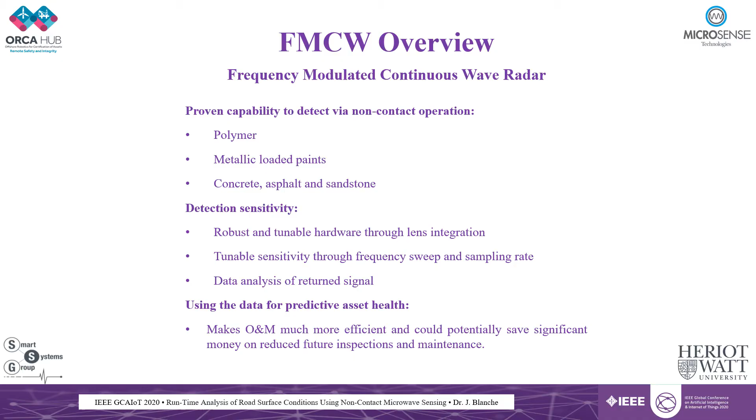The system represents robust and tunable hardware with the potential for dielectric lens integration to determine radiation spot size on a target with tunable sensitivity through frequency sweep and sampling rate, and with multiple options for post-processing of the acquired data, either via real-time edge computing prior to telemetry or for later off-site data analysis during integration with digital twin architectures. Of course, using the data for predictive asset health makes operations and maintenance of an asset much more efficient and saves money via reductions in maintenance downtime.

To continue the overview from the previous slide, FMCW analysis of a target provides previously inaccessible data on measurands indicative of failure modes in low dielectric materials and metallic surfaces, with key advantages over other integrity monitoring techniques. The system is non-destructive and non-invasive, which reduces the risk by eliminating physical intervention and interaction. This means that the sensor can be used from a more remote or safe position with a usable range in the tens of meters. The data can be edge processed and communicated via telemetry in real-time or runtime. This is via handheld, vehicle, or robotic mounted deployment.

The sensor is harsh environment capable, meaning the millimeter wave signal can return data in opaque environments, mist, dust, and in high temperature, high pressure settings, ultimately reducing downtime by operating in challenging conditions where optical systems fail. The system is reliable, with simple, robust, solid-state electronics designed to military specifications, meaning it can take a G-load shock having been ruggedized. The sensor is also ATEX CE certified, meaning it won't cause a spark in a flammable environment should it be placed in one.

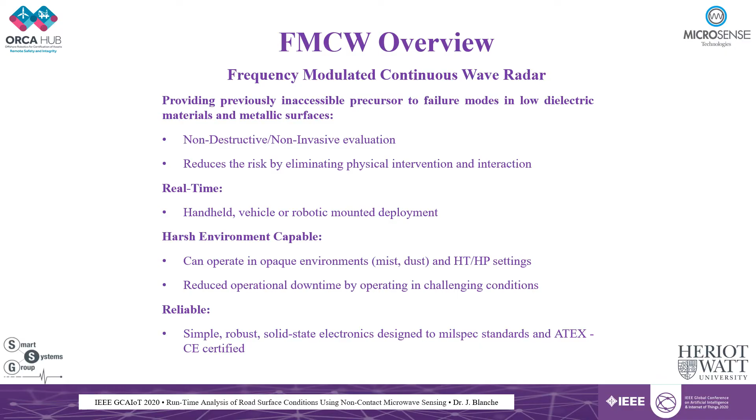To provide an overview of the technical challenge for road asset integrity inspection, generally speaking, reducing operation and maintenance downtime results in greater asset productivity. Highways and byways are a major national infrastructural asset, and their smooth operation is critical to both the economy and the wider society. Reductions in highways efficiency therefore cost the economy and impact society.

Our motivation is therefore to provide runtime holistic data of the highways network by providing edge analyzed data on road integrity via efficient salt deposition in wintry conditions. In doing so, we aim to optimize the resource expenditure of the valuable and polluting resource, salt, minimizing the environmental impact of salt dispersal on national road networks and the wider infrastructure it serves.

Our method is that we have employed the novel application of frequency modulated continuous wave radar in the K-band for analysis of porous composite structures. We have approached this problem using our patented microwave sensing methods, which have been applied to several use cases. Although we are focused on road surface integrity here, our publications list and YouTube address, shown at the end of this presentation, showcase our parallel millimeter wave sensing applications.

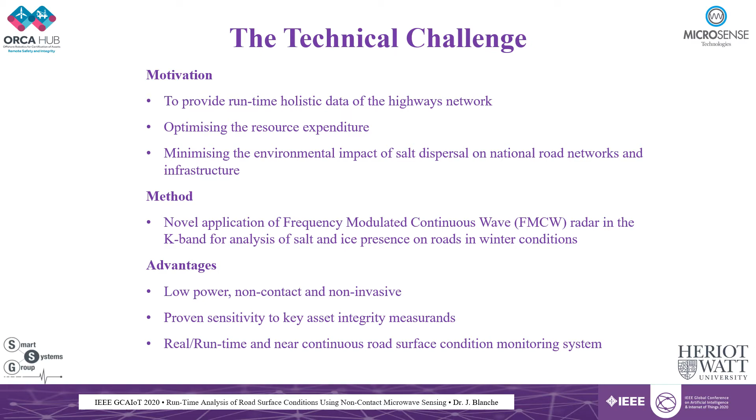The common thread from all our research using this sensor has shown that the key advantages of FMCW result in a system with low power output with low demand on power systems, a non-contact and non-invasive sensor with an appreciable range, proven high sensitivity to salt, water, brine, oil, and porosity within low dielectric structures, and has a real runtime front-end analysis data capability and is suitable for low latency data telemetry with a roughly 30 millisecond computation time.

FMCW sensing in real time can inform gritter operators and private users of residual salt conditions and ice formation. Our work in this role stems from our applications to wheeled robotic platforms and, ultimately, is aimed at increasing confidence in braking systems at the time when you need them the most, in icy, wintry conditions.

The value of this work is in the economic and bespoke use of salt under dynamic road and wintry weather conditions for optimal resource use for councils and to improve road user safety. Thus, our sensor system is intended for integration with vehicle systems and to augment currently available road monitoring systems, which are outlined in the published paper version of this presentation.

Current guidelines issued by government institutions require predetermined dispersal volumes that are calculated as a function of road surface temperature and environmental conditions. These are, in turn, derived from weather station data and patrol vehicle observations. However, beyond meeting specific criteria, the presence of chemicals and salt products dispersed by council-operated or contracted vehicles is only quantifiable by the detection at very select and often sparsely distributed points.

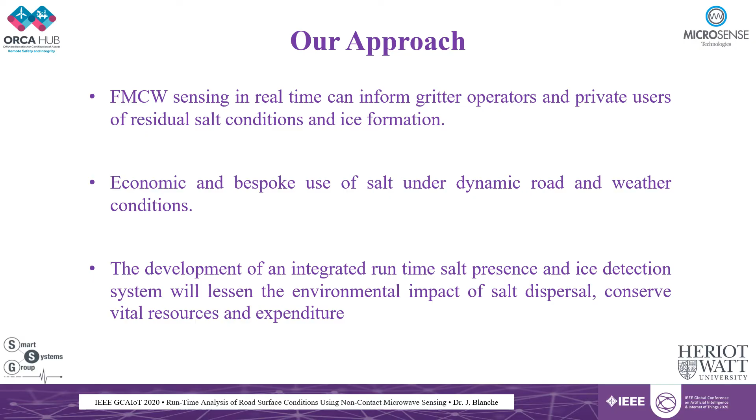FMCW detection in the K-band offers a real-time and near-continuous road surface condition monitoring system with the potential to inform civil operators and private users of dynamic road conditions. By updating a synthetic environment architecture with this system, the state of health of the entire road network may be understood in runtime, while simultaneously adapting the salt dispersal rate to the conditions observed at the time. This saves the environment from excess salt pollution and optimizes resource expenditure.

The FMCW signal response to 20% brown salt brine solution applied to a road section was evaluated at an ambient laboratory temperature. This figure shows the Fourier transformed amplitude extraction response in the time domain, extracted for the first interfacial reflector. Applications of 20% brown salt brine were deposited in the sensor field of view and allowed to fully evaporate before the same volume and concentration of brine was reapplied at the same spot. This was repeated 4 times to accumulate residual salt, and in each case the applied brine volume was equivalent to 30 milliliters per meter squared.

Analysis of this figure shows the first application of 20% brown salt brine solution establishes a signal baseline, with subsequent applications of the solution showing higher amplitude responses. The observed decay in signal response over time correlates to the water content in the brine solution evaporating, leaving residual salt levels incrementally higher than the previous application. From these results, it is established that the FMCW radar in the K-band is sensitive to deposited brine in the volumes used for de-icing roads.

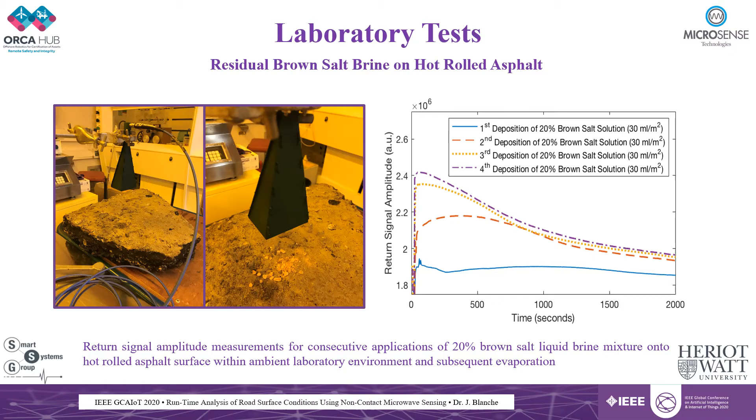This next experiment tests the response to a melting layer of thin ice applied to a concrete slab which was frozen to -15 degrees centigrade prior to each application of salt or brine. Each applied layer was 1 centimeter thick over the 10 centimeter square target area and weighed 13 grams. Differing concentrations of salt were applied in 3 experimental runs. First, a control test used no added salt or brine and measured the time taken for the ice to melt and evaporate in ambient laboratory conditions.

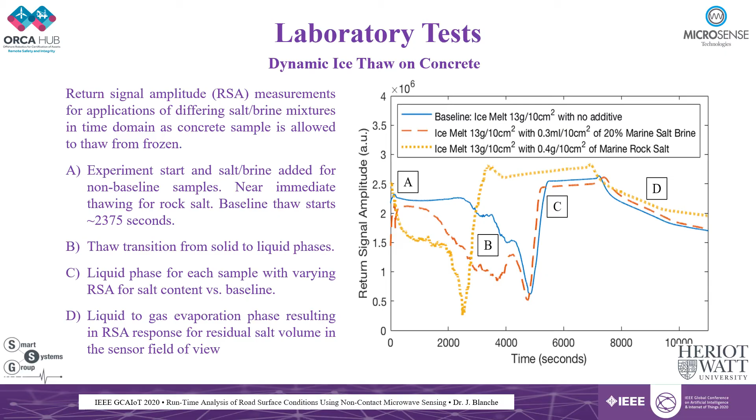For field testing of salt presence detection on an active roadway, we applied the FMCW radar to corroborate the results previously attained in the laboratory. How would the system fare in a real-world deployment role?

Working with Tayside Contracts Limited, a contractor situated in Dundee, charged with the winter maintenance of the Tayside highways, the FMCW sensor was fitted to a fleet gritter vehicle for deployment on a standard de-icing route. This route covered approximately 13 miles at an average vehicle speed of 28 miles per hour.

These tests were conducted during cold but non-wintry conditions to minimize disruption to normal fleet operations. Each trial was performed at night to minimize variations in the route's duration due to traffic and consistently disperse the minimum volume of salt from the salt dispersing system, which was 10 grams per meter square. This was for resource economy.

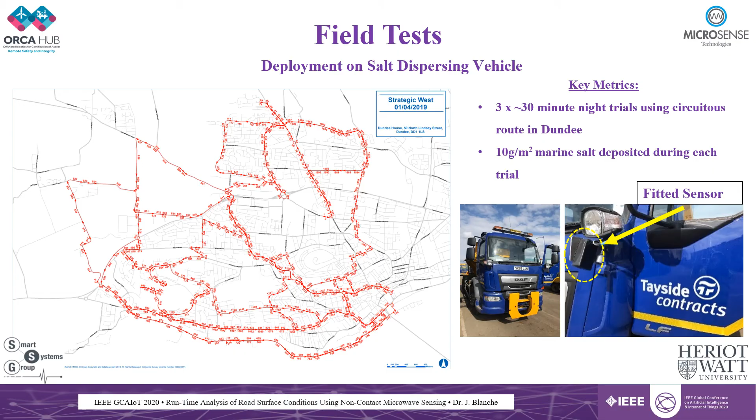As in the laboratory tests, the deployed sensor acquired data once per 5 seconds. The sensor was mounted 1.7 meters above ground level, giving a field of view of approximately 1.2 meters squared of the moving road surface.

Data obtained from a weather station located on the test route gives the conditions on the night of the experiment as consistent throughout the test period, with no rainfall and a measured surface temperature ranging between 7 and 8 degrees centigrade. This data shows that laboratory-based and field experimental results are consistent and validate the suitability of K-band FMCW sensing in this role.

Understanding the condition of roads and highways in winter conditions is crucial to the efficient operation of national transport networks. Treatment of road surfaces under present guidelines requires the deposition of set salt volumes per unit area and is assessed by measured local temperatures and forecasts. The accurate and real-time measurement of residual salt volume on the road surface is not currently applied to protocols that define the volume of salt to be deposited.

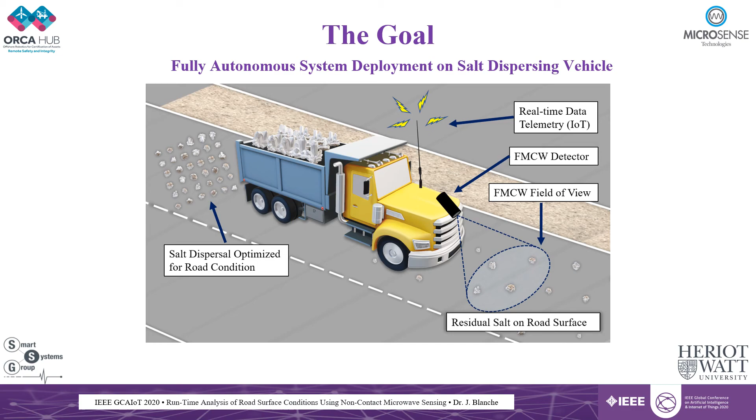This research has demonstrated that FMCW sensing can provide access to previously inaccessible road surface characteristics as shown from our laboratory and field trial analyses. Measurement of FMCW return signal amplitudes has evaluated residual salt volumes per unit area against a known baseline. These experiments have also shown that ice and ice melt are distinguishable with unique FMCW signatures in a laboratory environment.

Field deployments have verified the capability of FMCW to detect residual salt presence from previous depositions and allow for the runtime assessment of road surface salt volume on a moving vehicle.

In future work, the developed FMCW sensor system will be complemented with software programs that collect, view, and manage data automatically via machine learning. Our data can also be integrated into a holistic infrastructure and asset integrity model, with real-time sensing incorporated into a digital twin model for human-in-the-loop decision-making, allowing for the optimization of salt-dispersing vehicles and resource expenditure. The measured data can also be sent to road maintenance engineers in real time to perform road maintenance operations that are specific to an assessed geographic position.

Further development will assess the potential to detect porosity and delamination between asphalt layers, water and ice ingress, and detect subsurface delamination and precursors to pothole formation via the continued deployment on a private research vehicle.